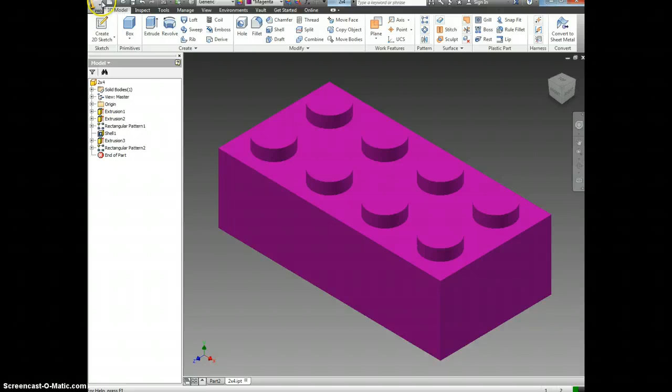So to do this, we're going to open up a new Inventor page, and we're going to start a sketch, and we'll throw it onto this top plane, and we're going to start with a rectangle. And based on the dimensions that you found about Legos, you'll see that the total length is going to be 10/8, which we can put in as a fraction, and it'll calculate it as 1 1/4. And the direction the other way is going to be half of that, which would be 5/8, which it calculates

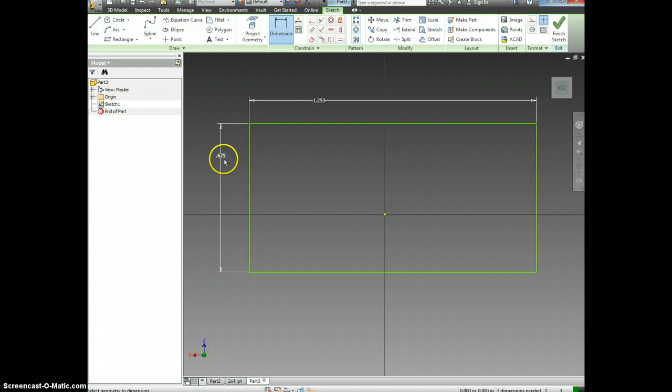as 0.625. Then we're going to take this and extrude it up a height of 3/8 so that you have a rectangle that looks like that. Okay, now we're going to add a knob on top, so we're going to take a sketch, place it on top of this, and we're going to take a circle and throw it onto that sketch.

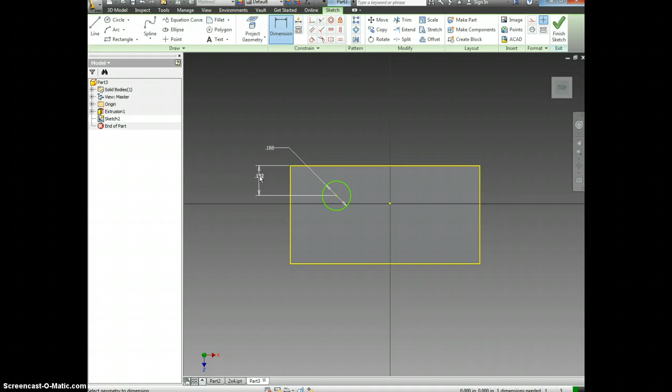The diameter of that circle is going to be 3/16, and the distance from the center point of the circle to the sides is going to be, because of the standard Lego unit, not 5/16, 5/32. And from here to here, also 5/32. So your knob looks something like that.

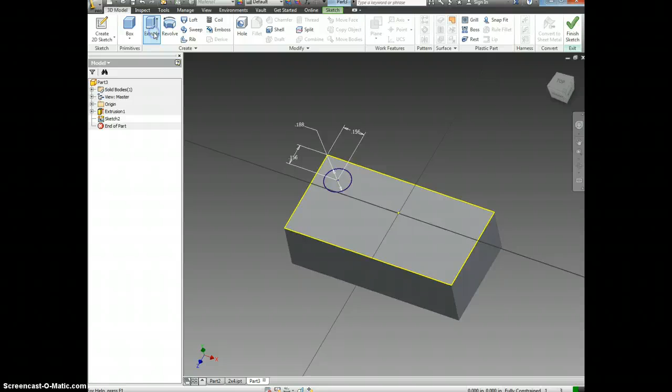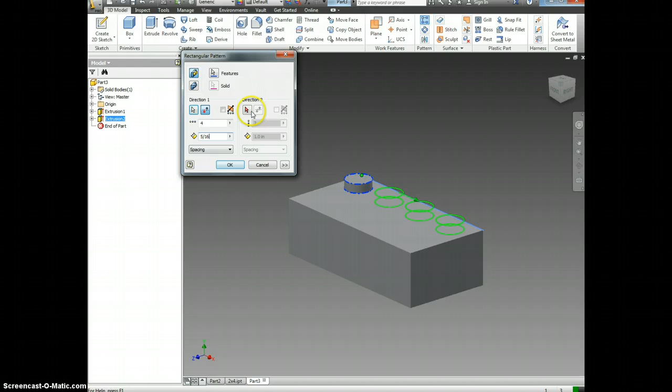Then we're going to go ahead and extrude this, and we're going to bring it up 1/16 of an inch. So it looks like that. And then we're going to go to rectangular pattern and select that feature, and we're going to pattern it one direction, 4 occurrences with a spacing of 5/16. And the other direction, 2 occurrences with a spacing of 5/16. So it looks like that.

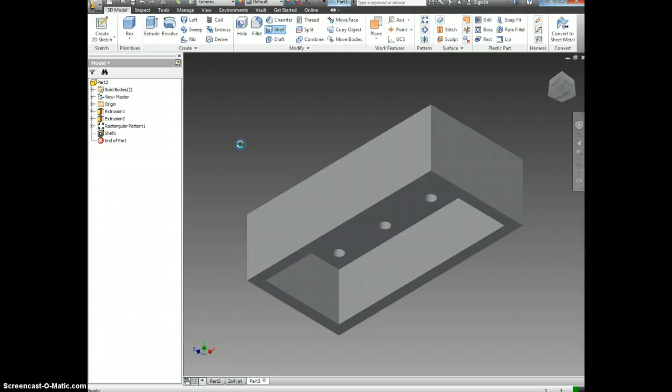Then we're going to look at the bottom of our Lego, and we're going to go to shell, and we're going to select the bottom of this Lego, and we want to shell it so it's left with a thickness of 1/16 of an inch, and we'll say OK, and that cut the little divots underneath the knobs that you can see.

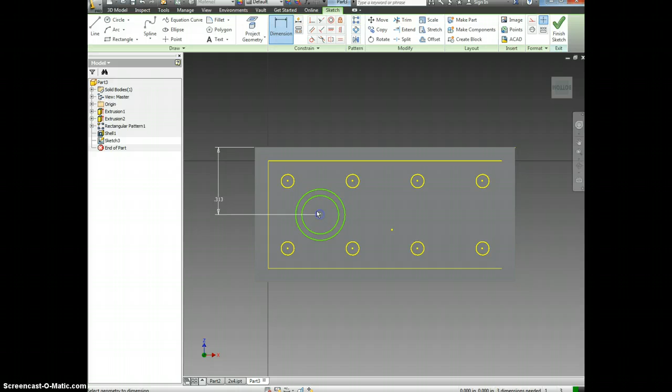All right, and now we need to build the bottom. So I'm going to put a sketch plane on this face, and we're going to put 2 circles right about here, and they'll be concentric with one another. It's not in the right location yet, but it's roughly in the ballpark. Now I'm going to dimension that center point so that it's 5/16 off of both sides. So 5/16 of an inch and 5/16 of an inch this way.

And I want the diameter of this inside circle to be 3/16, because that is the diameter of a knob, so that a knob from another Lego can fit right into there. Now I don't know exactly what the dimensions for this should be, but I know that a knob should be able to fit perfectly right there. So what I'm going to do is go up to Project Geometry, and I'm going to project the knob that's on top of this piece. I projected it, now I can still see it.

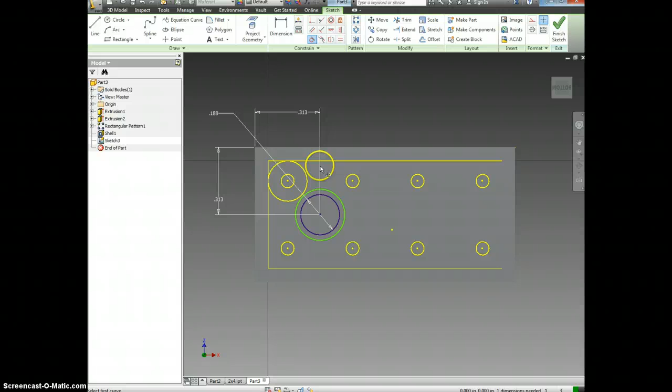So now I'm going to go to Tangent on the top. I'm going to select tangent, and I'm going to tell this outside circle to be tangent with this circle, so now they perfectly come together. So now I know that outside circle is exactly the size I want it to be. And the inside is 3/16 like I told it to be right here.

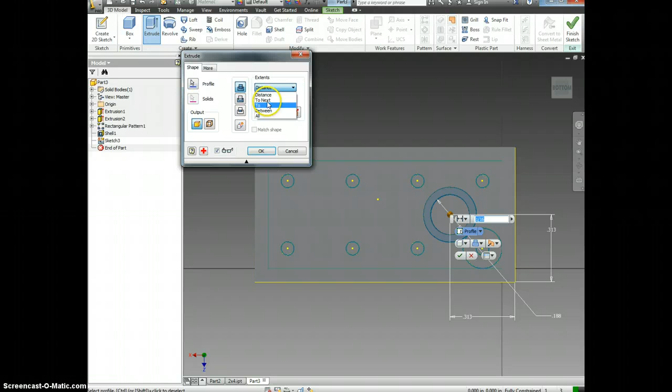So now I can go to extrude, and I can select that in-between place between those 2 circles, and instead of a distance, I'm going to say come up to this place right here. And if I hit OK, I've now extruded that circle up to that level.

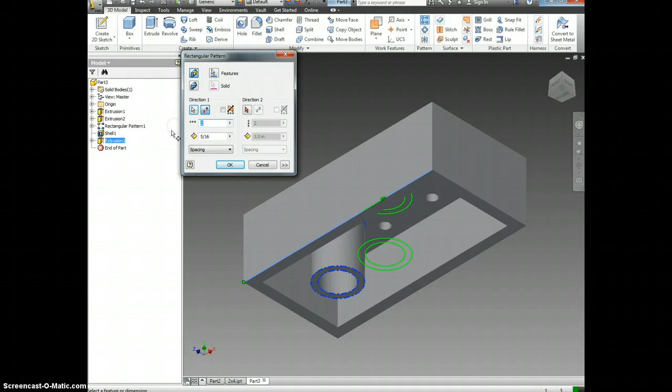And now I'm just going to go to rectangular pattern. And I'm going to select that feature that I just made. And I'm going to select a direction of this edge. Switch the direction. Spacing of 5/16 and 3 occurrences. And we'll say OK. And we now have our first Lego piece, which is a 2x4, and it looks just like a Lego.